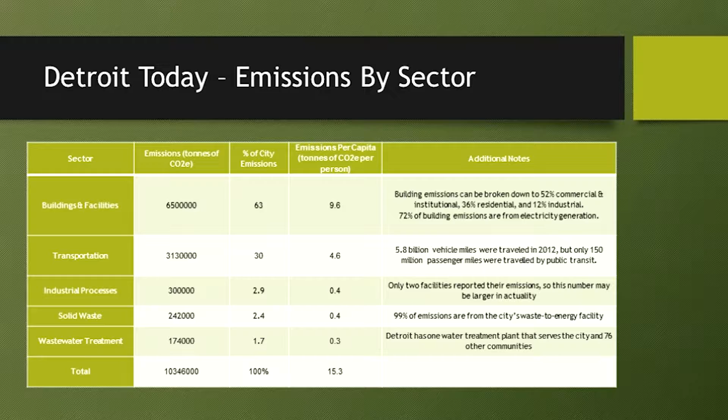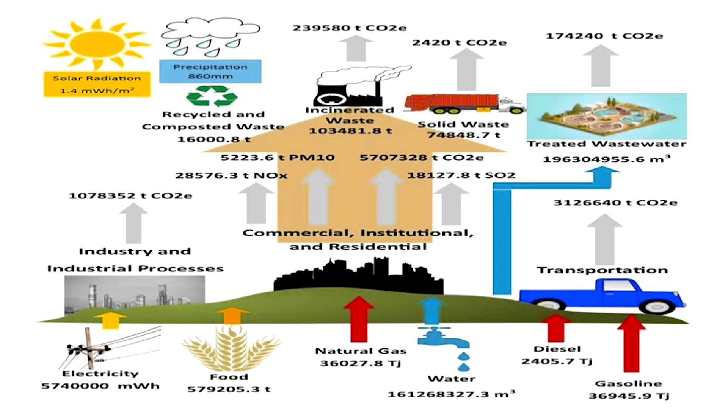So what is our goal? Fortunately for you guys, each of you had a city with a plan in place saying what the city wanted to be, what it wanted to do in the next 20, 30 years. Detroit has absolutely nothing. I don't know why, but we just got lucky like that.

So what we did was look at different reports by third parties. One of them was from Detroit's electricity and natural gas utility company, DTE. They had a report stating they wanted to reduce emissions by 80% by 2050. So we thought we could probably match that, give or take. Our goal is to reduce emissions by a total of 70% from 2017 baseline levels.

We believe this will be accomplished by not only rehabilitating the electricity grid, but also by doing 4 types of developments: developing denser neighborhoods, developing more green initiatives for buildings, developing an urban forest, and developing more rapid transit in the city. So to start off, I'm going to start with the building initiatives we've had in place.

We came up with 6 main initiatives, which fall into 3 different categories. Overall, we believe these initiatives will reduce emissions by 1.2 million tons of CO2 in the residential sector alone.

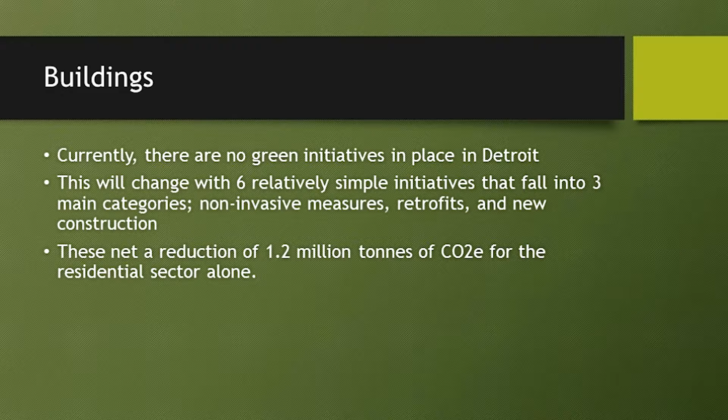The first category is non-invasive measures - anything that has nothing to do with construction. The first one, which we already have in Ontario, is to ban all incandescent light bulbs from being sold in the city and only allow LED lights to be sold. This is because incandescent light bulbs are something like 98% inefficient in producing light, while LED lights are about 80 to 90% efficient. That's a huge gain from lost energy.

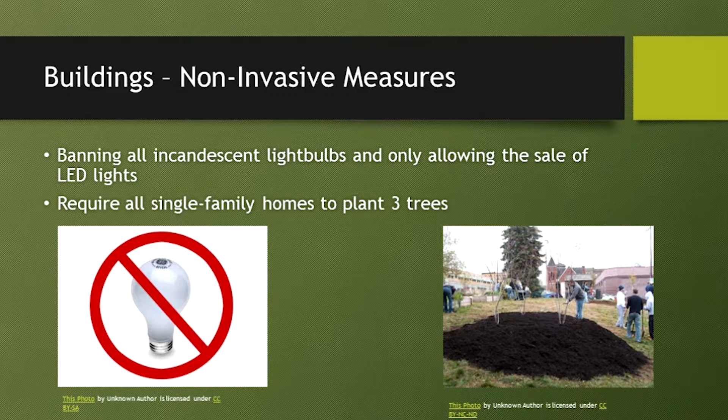The second non-invasive measure is to require all single-family homes to plant 3 trees each. Why? Trees beautify the neighborhood while also sequestering CO2 and reducing cooling needs, because they produce shade and have evaporative processes which reduce cooling needs.

Second category: retrofits. We want to get all the old single-family homes to have updated insulation - R19 insulation in the basements and R60 insulation in the attics. Why? We found out this will reduce heating needs in conventional Detroit homes by 40%.

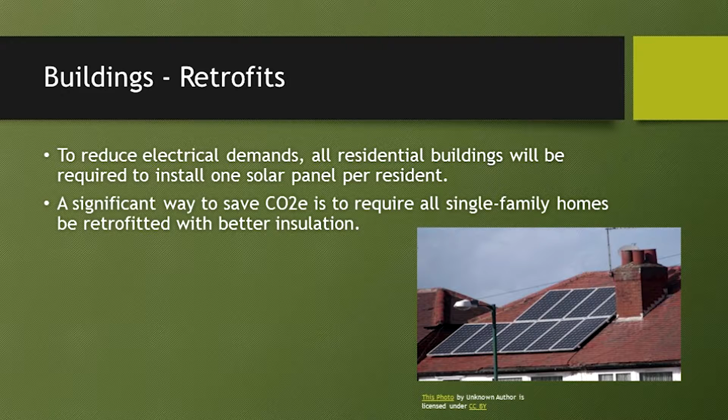The other retrofit we want to do is require all homes to have a 200-watt solar panel installed for each resident. This is because it will reduce the need on the electrical grid, which is dirty, and also save people money.

The last category is new construction. We want all new multi-story residential buildings to have a green roof installed. I'm not going to get into the details - I'm going to beat a dead horse, we've heard many times how good green roofs are.

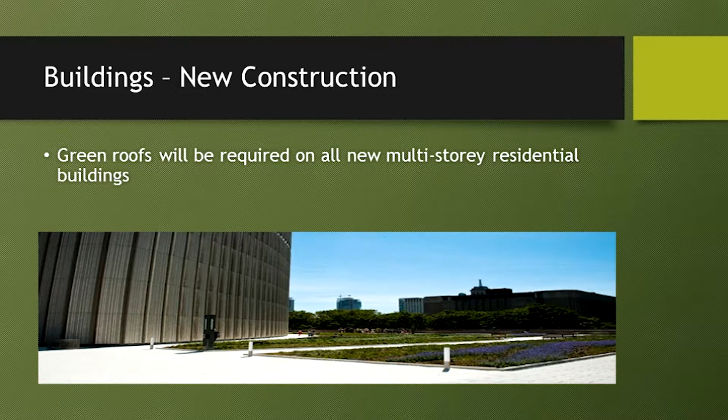The last initiative for buildings is we want all new single-family homes built from now to 2050 to be built as passive homes.

It's expected that 50,000 homes are going to be built from now until then, and we want passive homes because they are airtight. We have efficient ventilation systems that reduce the energy need for heating and cooling by 90%.

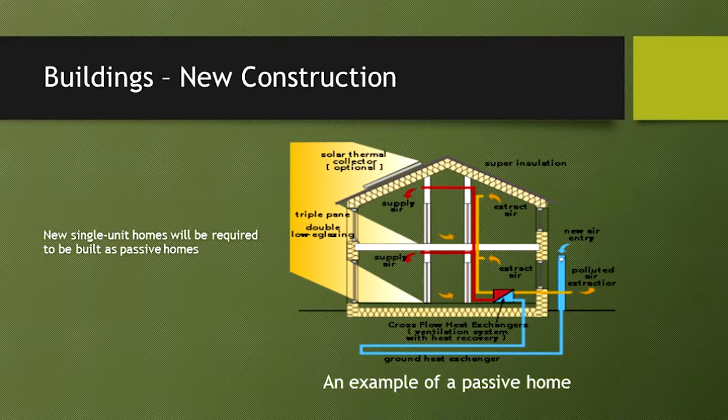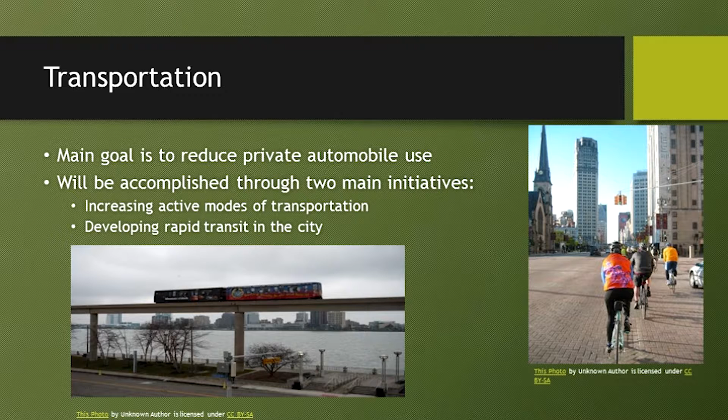Now to transportation. Our main goal for transportation is to reduce the need for private automobile use. We want to do this through two main ways: increasing active modes of transportation, and developing a rapid transportation system in the city. You'll understand why once I talk about the current transportation system in place in Detroit today.

In terms of biking, there's currently 400 miles of bike paths in the city, which isn't bad, honestly. But the problem is there are many gaps in the system, so a lot of paths are not connected to each other. In addition, safety is an issue. In 2016 alone, there were 177 crashes with bicyclists, and 38 deaths.

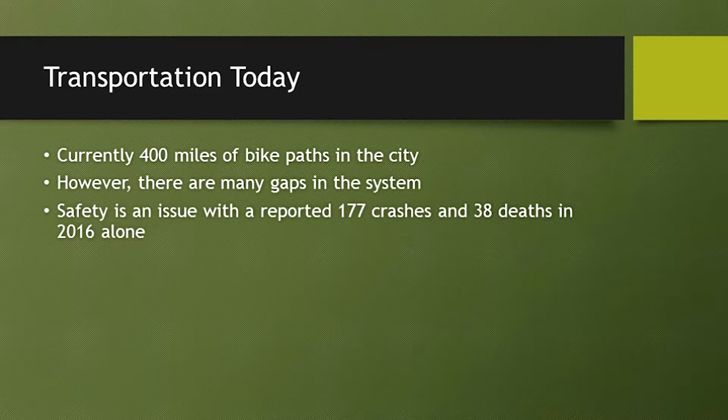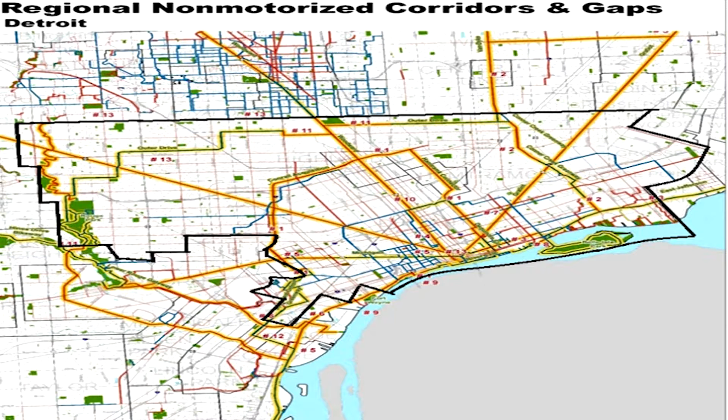So we want to reduce this. How are we going to do this? Well, first, we're going to reduce the gaps by introducing bike lanes on all these yellow paths, which is where all the gaps are identified by the regional governments. To help with safety, we're going to have separated bike lanes, as can be seen in this diagram.

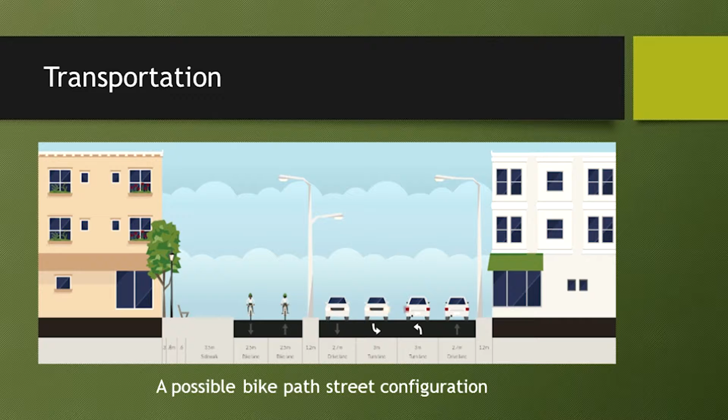In terms of public transit today, this is what the bus system looks like. To the naked eye, it looks pretty good. Bus routes are about 1 mile apart from each other, and it covers most of the city. The problem arises from the headways of buses, which are about 20 to 40 minutes during peak hours. Nobody's going to use transit if you have to wait almost half an hour to take a bus.

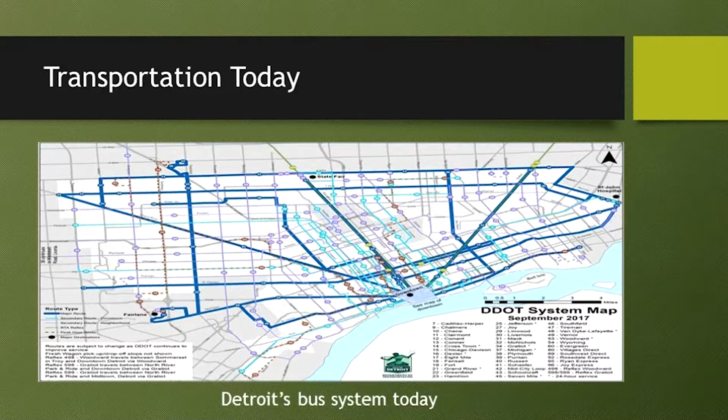In terms of rapid transit, they do have a streetcar line, which is very poor with headways of 25 minutes, called the Q line. They also have the Detroit People Mover, which is just a unidirectional monorail. However, we're not considering it as a transit system because it's basically a tourist trap.

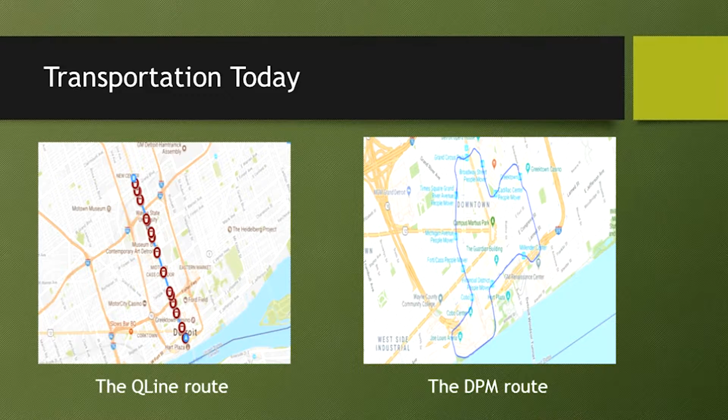So what are we going to do to increase transportation in the city? Well, we're going to have 4 new LRT lines introduced in the city and expand the Q line to reach Detroit's borders. We're also going to create 6 new BRT lines. We want to be able to connect people from their homes to the commercial centers or to the industrial centers. We want people to not take the car when they need to go to work or want to see a movie or go to dinner.

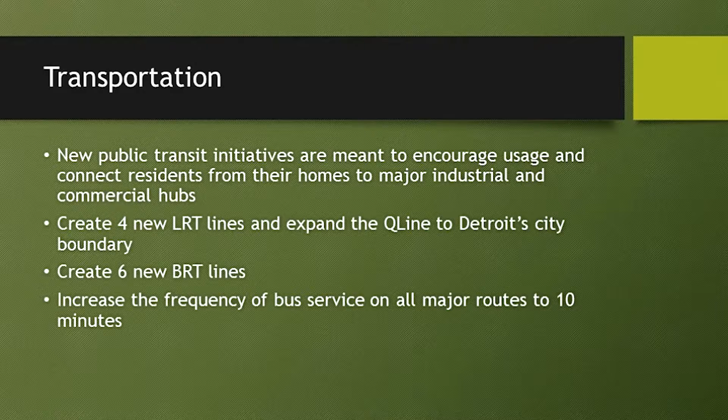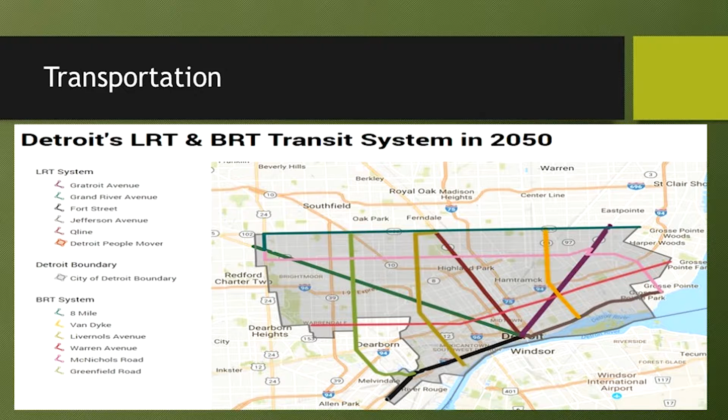In order to connect people to these new lines, we're going to have to increase the frequency of bus service on all major routes to a 10-minute headway. This is just a map of where we propose to have our LRT and BRT system. As you can see, it covers quite a bit of the city, so almost anybody should be able to reach a line within 10 minutes of a bus ride.

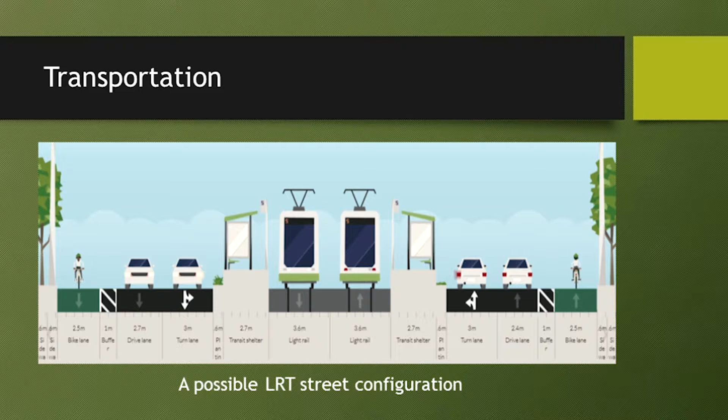I'm going to turn it over to Chris now.

So thank you, Dan. I'm going to be talking about the land use of Detroit. Detroit as a city has sprawled a bit, so we want to promote mixed-use dense communities throughout the city with an emphasis on green and blue spaces.

So this is what Detroit's land use currently looks like. On the left, everything's spread out. The yellow is low-density residential communities. The green is the parks, and it's not too much gray right now.

This is our proposed land use solution. The yellow is low density, the orange is mixed density, and the red is high density residential areas. The green is the park space, with the purple being the industrial sectors.

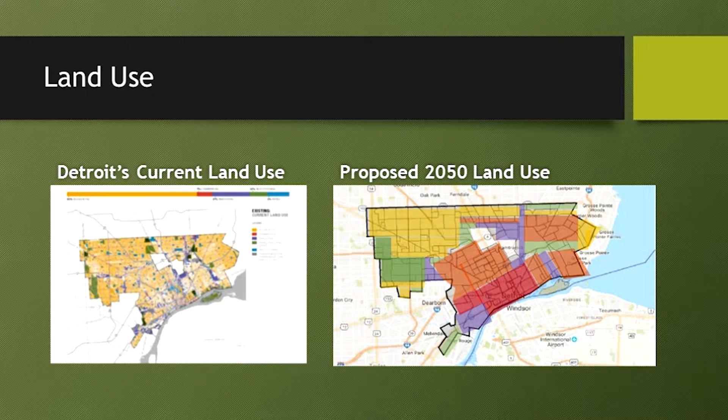Currently, we want to lower the residential, commercial, and industrial land use percentages while adding them to parks and open spaces in order to have a greener city going forward and promote active transportation measures. So neighborhoods in Detroit in the future will be designed with BRTs and LRTs in mind, as well as active transportation methods. We want stops to be around 800 meters from all residents, so it's accessible for people who want to use it.

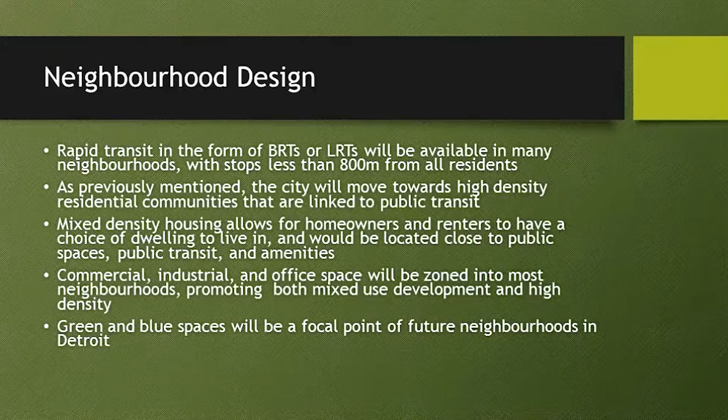Also, the implementation of mixed-density housing in communities will allow residents to have choices in where they want to live, as well as being closer to public spaces, transit, and other amenities. We want to zone commercial, industrial, and office spaces within residential areas to promote mixed-use development and high density of the city, and we want to emphasize the green and blue spaces that are used.

This is an intersection in Detroit today. As you can see, a lot of empty space, low, small buildings. This is an example of the same intersection that we proposed in 2050. As you can see, there are dedicated lanes for transit, more green space with additional added density, and a bunch of different kinds of buildings - that's the mixed-use portion of it.

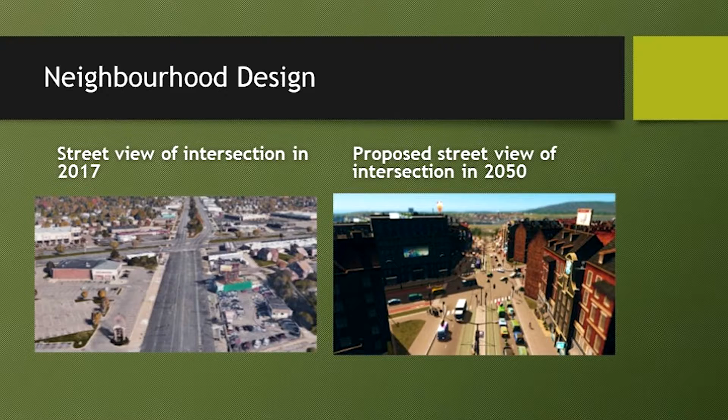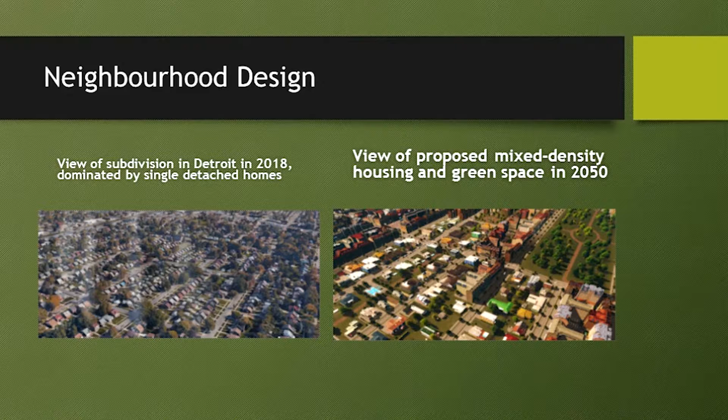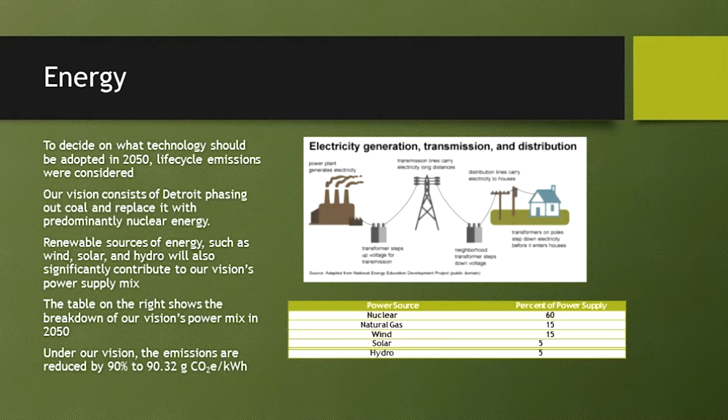So Detroit currently has quite a few water, stormwater, and wastewater issues. Since they have such old housing, they have very old plumbing fixtures. If we were to upgrade those, they could result in around 30% savings in water consumption. They also have a problem with piping insulation, so they need more energy to heat water up. If we were to add more insulated piping, our water consumption all over Detroit will be reduced by approximately 25%.

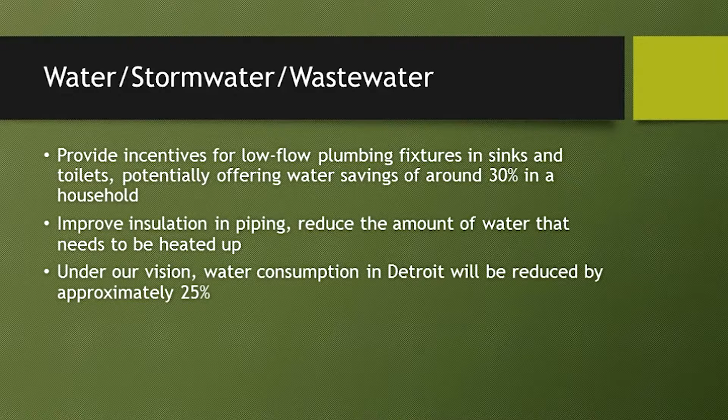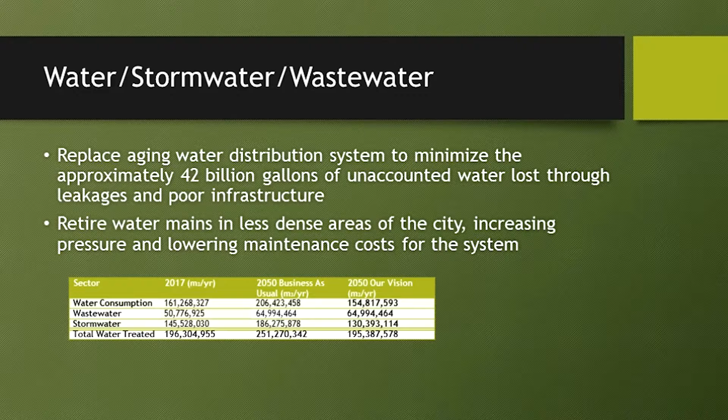So one thing Detroit is pretty good on right now is implementing green stormwater infrastructure. They have a lot of urban farms, rain gardens, and permeable pavements that are used to alleviate the stress on the combined sewers in Detroit to minimize the amount of sewer overflows. So we agree with Detroit's plan, and we want to go forward with it. Our plan hopes to decrease the stormwater numbers by around 30%.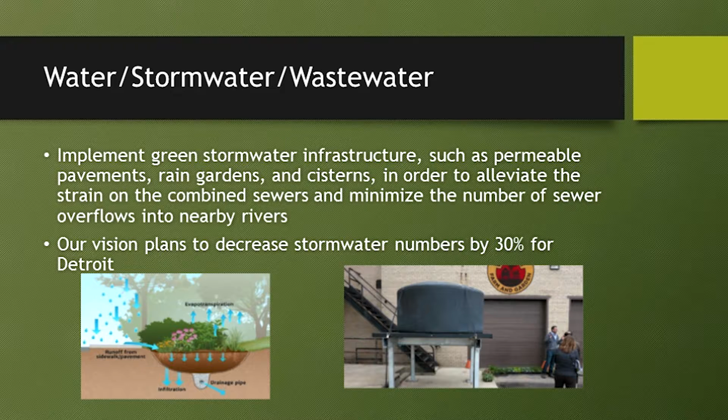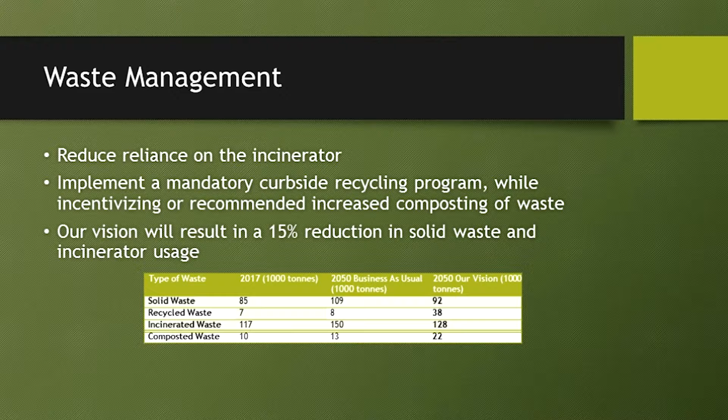As Q mentioned, there's pretty poor waste management in Detroit. There's no mandatory curbside recycling program, and there's very little composting done in the city. So we want to lower the amount of waste that is sent to landfills and incinerated, and we want to increase the amount that's composted by implementing a mandatory curbside program while emphasizing and incentivizing composting.

So this is our greenhouse gas emission comparison. There are substantial decreases in residential, industrial, and transportation sectors, with a slight increase in commercial and institutional emissions. Overall, our number does increase a bit by 2050 in terms of gross emissions. However, if you look at it per capita, it lowers by about 3 tons of CO2 emissions per capita.

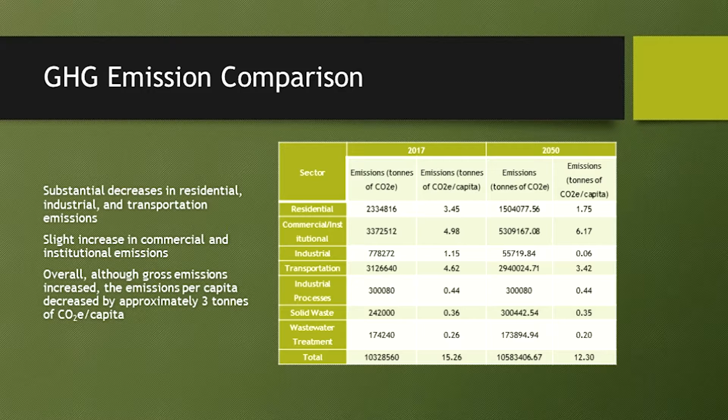So I picked 3 sustainable development goals that are probably most pertinent to Detroit. The first one is 11.2, which has to do with safe, accessible transport systems throughout the city. Our neighborhood design is planned with transit in mind, and with our vision, our transit will potentially increase by around 20%. All the transit will be designed with accessibility in mind.

The next target applicable to Detroit would be losses due to disasters such as water-related disasters. Everyone knows about Flint, which is near Detroit. So even in places like the United States that are developed, there can be real serious water-related disasters. Our plan involves replacing the infrastructure, which would hopefully reduce leakages and minimize the potential for contaminants getting into the distribution system, allowing for a more efficient system.

And finally, the third goal would be to reduce the environmental impact per capita in these cities. As mentioned, Detroit has a very poor system, and under our vision, they will implement a mandatory recycling system, which will definitely increase its recycled waste. Under our vision, it'll go from 7,000 tons in 2017 to around 38,000 tons in 2050. Additionally, using the incinerator less will reduce the amount of particulate matter.